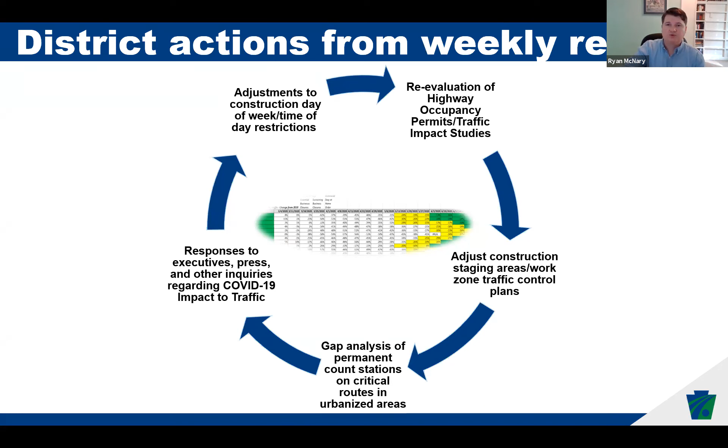So what we did with all this is we wanted to make a tool, going back to the TSMO performance program, where we could get out of the business of creating an Excel spreadsheet 2 times a week, but also empower our districts and our users to have the ability and some flexibility to look into the data on their own. Steve's going to be going over some specific examples of this, but I wanted to do the first introduction on what the tool can actually do.

One good thing about being virtual, I can pull this right up on my computer right now. So what you're looking at is the real data. Now this is in the dev environment, so we have it through October right now, but it gives you the filterability to look at specific districts, your type of roadway access, so limited or no access, county, road specific information. You have the ability to go day of week. You can do your peaks, for example.

I gotta make that smaller. 1 second. I'm just gonna do something real quick here. I'm gonna do passenger vehicle only. So you can see here that the lines in blue are your 2019 counts. The bars are your 2020 counts for passenger vehicles on your permanent count stations. So you can see when the impact occurred in real time, and then you can see where we are.

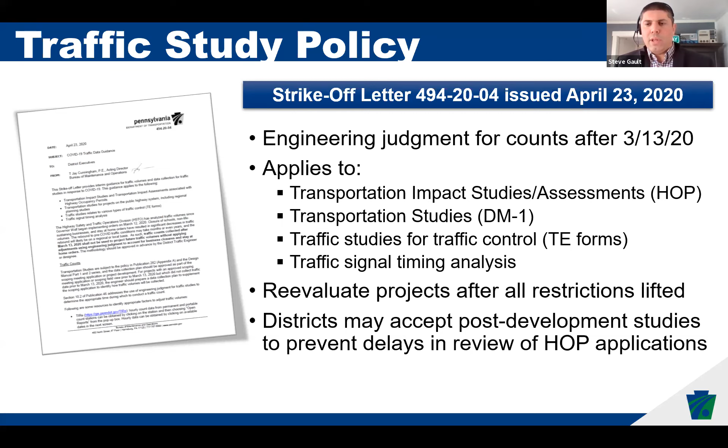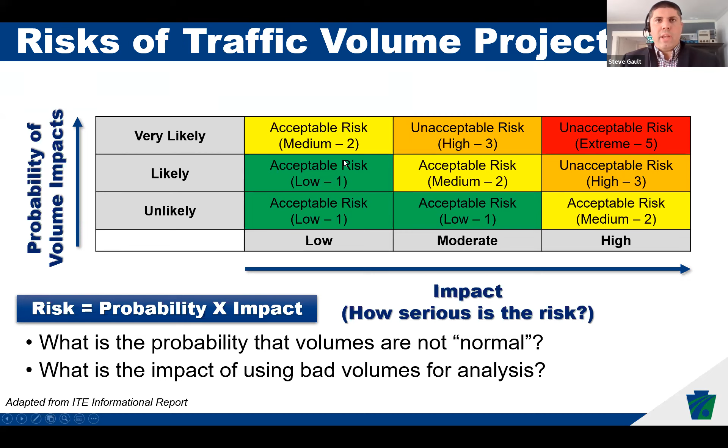And I think with that, Ryan, I'll turn back over to you to talk about the fuel tax. Appreciate it, Steve. So I said this kind of in the introduction. A request bounced around in the DOT a little bit to look into potentially projecting or coming up with a model based off of the information we have. So Doug kind of implored us to figure this out. You know, we brainstormed, and I believe, Doug, you gave us 24 hours to do this. So we came up with what you see in front of you.

Now we looked at our data sources and what we have. So we did partner with the Department of Revenue here. So we were able to get the gallons of gasoline and diesel that were sold. We know our tax rates for both. Second highest in the nation. I think we're all aware of that.

But then at that time, INRIX was also supplying a COVID percent VMT estimate, and I believe Streetlight was at the same time too. But what we've done since then is prepare a monthly report for projections based off of all the information we have, whether it's coming from the Department of Revenue or what we're seeing in our permanent count stations or what INRIX or Streetlight is reporting. And then we can project the upcoming month's revenue. Our outcome was we've been within 3% variance, plus or minus. So that's pretty good, we thought.

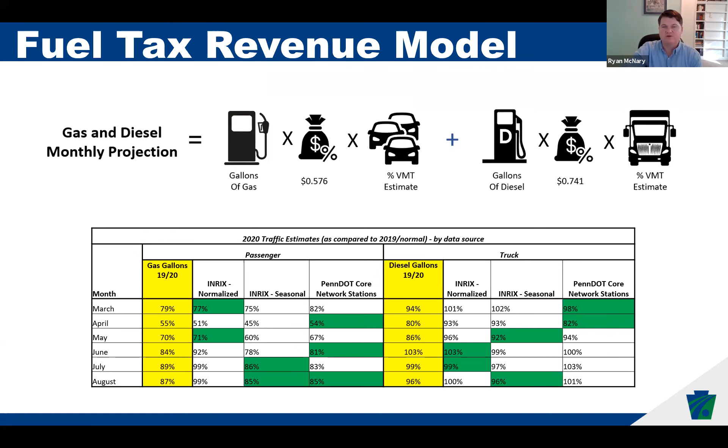But in the height of all this situation, I'll call it a situation, the COVID response, we saw those major drops, and it's a direct relationship to the revenue that you heard from the secretary on Wednesday. Kind of moving back to what Steve talked about is the new normal. What's driving this new normal? We don't really know. And honestly, it's because we don't have a great data set that tells us the who, wheres, whens, and whys. So we're investigating potential traffic data to improve that and answer those questions.

So this brought the origin and destination data concept back to the forefront again to understand who's moving now, where the commuter traffic is going. Put those hypotheticals to bed. It could potentially do that. In INRIX, for example, it's roughly around 3 million trips per day. Streetlight also offers this information. And primarily in Pennsylvania, a lot of our planning organization districts for major construction projects are already buying this to look at traffic impact studies. For example, if they're going to be taking a lane or multiple lanes on our interstates.

So we have an ongoing conversation right now with our program center. So it's a planning oriented office within PennDOT to maybe look into procuring a statewide license for this, but that's foresight. You heard the funding issues. We're probably not looking into new data soon, but if we can answer some questions here, it might be valuable. We have the number of existing DOT use cases elaborated on the bottom.

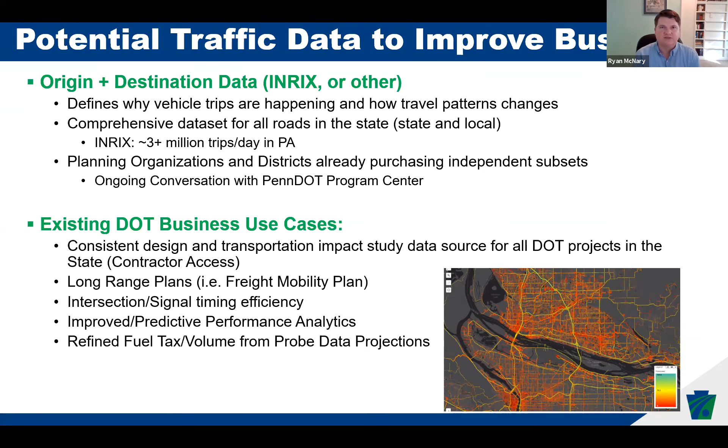So that's a lot of what we've done since March when it comes to volumes and working with our Bureau of Planning and Research and their permanent count stations. So I guess, Doug, we're probably taking questions at the end, but wanted to thank everybody for having us. We'll do them now. There's two questions that came in.

So was Planning and Research setting manual counts during the time frame? And if so, how is that information being used with the stuff in your program? Planning and Research setting manual counts during the time frame? Correct. We did not use the manual counts. We only used the permanent count stations. So the permanent count stations were out there. We didn't use any of the temporary counters for our analysis. I think that's what the question they're asking. I believe so. And you talked a little bit about it from the funding analysis about using the permanent count information.

One more question. For I-80, did truck traffic increase during COVID, resulting in the overall volumes being closer to normal? So I know from the info that you developed for the DTEs, we have roadway by roadway. Can you just offer any insight on what's going on on Interstate 80? So Steve, do you want to take that one?

Yeah, I don't have the numbers for I-80 specifically in front of me, but I know on the fuel tax slide that Ryan had up, as I saw that question come in, it looked like in June, July, and August, the fuel tax revenue was actually up about 1 to 3% statewide. So I think that's a sign that the truck volumes were up slightly. The passenger volumes were down in that 15% range statewide, and that's kind of where we've been relatively consistently for a while.

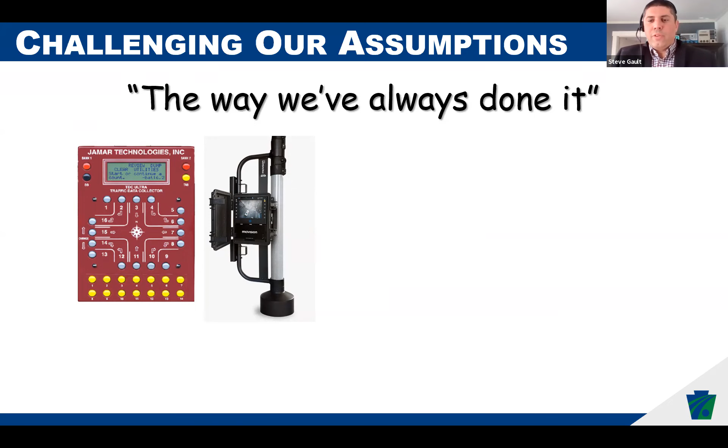Yep. Okay. So the traditional process for traffic signal timing started with turning movement counts, and then from there we go to modeling and optimization, typically using Synchro. And then at the end, we get a level of service. And we can think of that as our measure of effectiveness. And for traffic signals, the level of service is based on the control delay per vehicle.

And even though what constitutes the appropriate measures of effectiveness has already been evolving for the past several years, the COVID-19 pandemic provides new reasons to rethink our approach. So thankfully, we have the technology that can allow us to more effectively operate and time signals while keeping us all safe.

So I talked about that traditional traffic signal process, and its reliance on the manually collected turning movement count data. And the underlying assumption is the counts were done on a typical day. And that typical day is really the key thing. So historically, we assumed maybe a Tuesday, Wednesday, Thursday were typical days.

But imagine if a weather forecaster just picked a typical summer day and recorded the temperature because he thought it was somewhere between 4 and 6 p.m. Those are hours we use as traffic engineers, right? And said the temperature applied all day long and plan what to wear based on that forecast. So will you freeze in the winter? Well, of course, but why was this ever considered acceptable for traffic?

And if the traffic volumes were actually that predictable, then why are we spending millions of dollars trying to improve traffic signal operation and putting in technology and adaptive signals and all these things to account for variations? Well, that typical day assumption was pretty weak before, but the pandemic has dramatically changed traffic characteristics, and we haven't had anything close to a typical day since March.

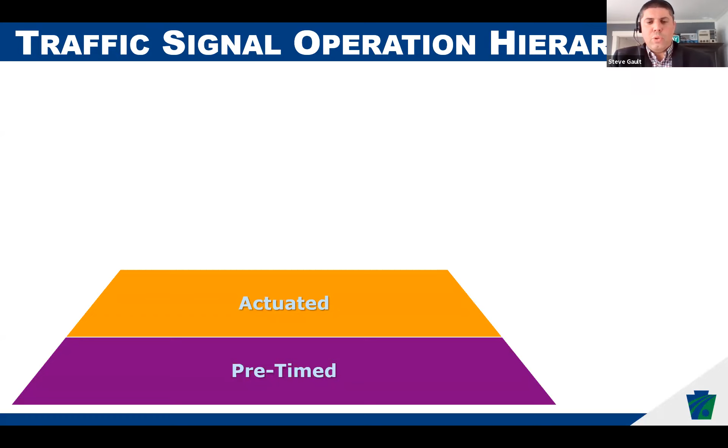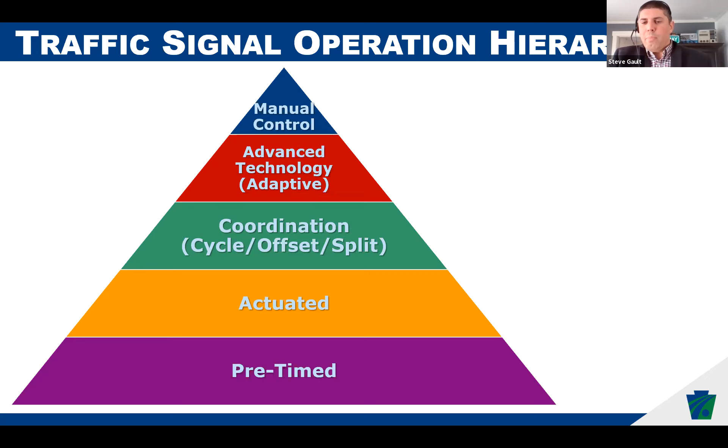And then we can start to link signals together with coordination and provide a cycle, offset and split to keep things synchronized and try to move traffic along a corridor. We can get more advanced technology such as adaptive signals and get more advanced in how we pick things. And then the one I put at the top, and this may sound a little strange, but I put manual control at the top because that's really the point where it could be something like an operator that's picking the timings for a specific event. So there's a lot of manual intervention, and it could even be using a pickle switch to manually advance the traffic signal phases based on live demand.

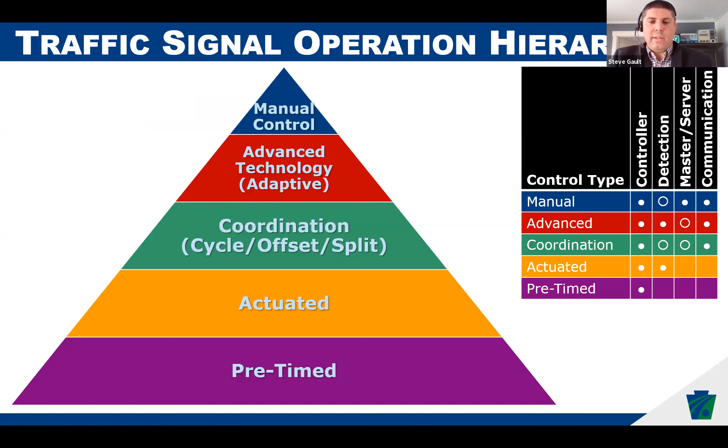So all of these require some combination of a controller, detection, either a master controller or server, and communication. And with all four of those components, they give us the most flexibility with what type of operation can be implemented at any given time. So when we want signals to work together and be synchronized, we typically call that coordination, and it involves the cycle, offset and split at each intersection. And there's different ways to pick what plan is going to operate at any given time. It's important to make sure that the clocks are synchronized for this to work.

The simplest method is a time of day schedule, which we have all over Pennsylvania, where the plan is predetermined based on the time of day and possibly the day of the week, or even the day of the month. The schedule can then reside in each controller, and it's being picked based on the schedule that's in the controller. It could come from a master controller, or it could come from a central server. Traffic responsive operation expands on this by selecting from predefined plans based on some sort of threshold of volume and occupancy from system detectors. And finally, a manual command is just saying, run this immediately, and this is the plan we want to implement now.

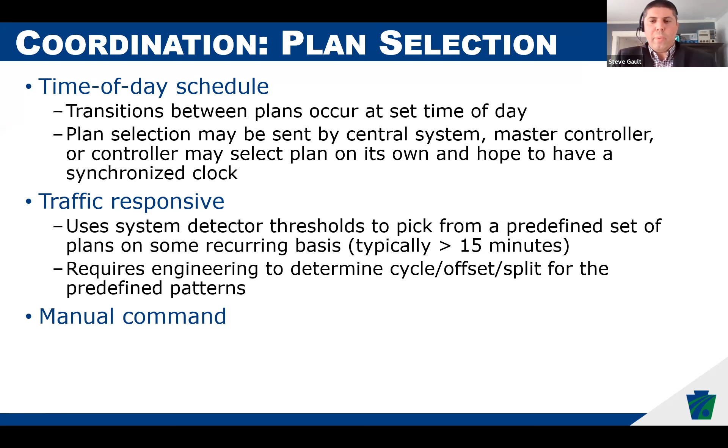So central systems allow an operator to remotely monitor and operate signals. And historically, PennDOT implemented a variety of central systems, with some examples shown here, based on municipal preferences and/or the low bid on a specific project.

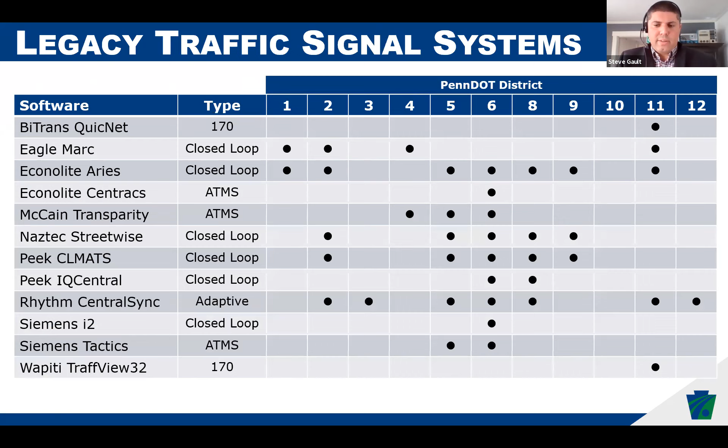So let's just take a scenario and think about it. So the interstate's closed. We need to detour traffic onto a signalized arterial. Maybe some cows got loose, which is a story I'll come back to. But then we have to think about, okay, what type of signal is it? Is it brand X, brand Y? And which computer is the one that runs that system?

And which seat do I need to sit in? And what are the steps that I have to do in that particular software to accomplish the same thing? And by the time we figure all that out, is the incident even still happening? Or did we take so long to actually even figure out what we need to do that it becomes irrelevant?

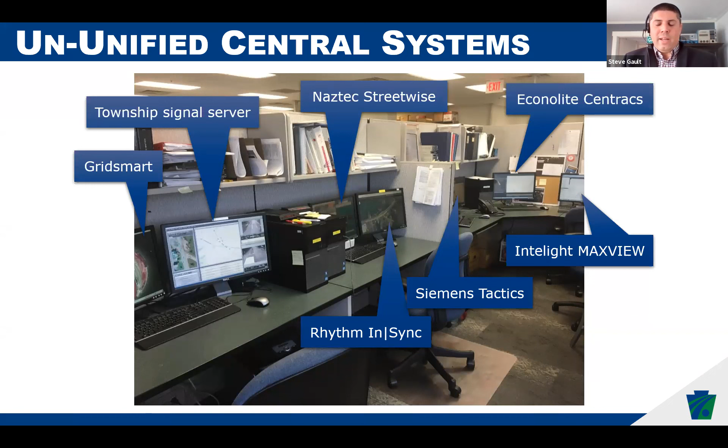So PennDOT's solution to this is a unified platform that can work with different brands of controllers, and what we call unified command and control. And there were a couple goals of why we did this, which should be fairly self-evident from what I was just explaining. But we wanted to provide neutrality in terms of the controller vendors. So we don't have to do proprietary bids. We don't get locked into any particular vendor for the hardware that's in the field.

And we can also make sure that municipalities that may have a certain preference are getting consistent equipment for their spare parts inventory. Obviously, the single platform is a key piece, and we want to be able to respond quickly to incidents, make sure that we can train people effectively and that they only need to learn one system,

and that will give us improved situational awareness. Even from a cost perspective, trying to maintain multiple different systems, each one has a support cost and contracts that we would need to be in with vendors to maintain the software and get patches and updates, and our IT staff needs to support all those. And finally, we want a platform that will allow us to measure performance, such as automated traffic signal performance measures.

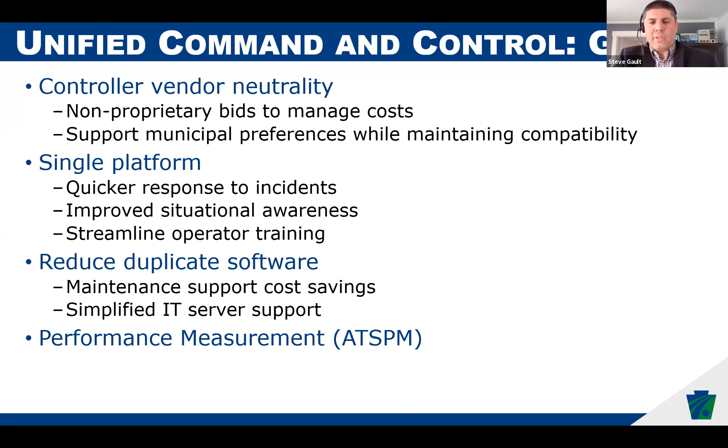So PennDOT procured the Intelight MAXVIEW system as our central system in 2018. And this is a web-based platform, which provides the benefit that we don't need to install any software on individual workstations for the operators to use it. At a basic level, it provides real-time monitoring and operation of signals that are connected to it. It provides a way to manage the controller timing databases. And it's also integrated with our OpenRoads ATMS software that's used in the regional traffic management centers for maintaining all of our other ITS devices.

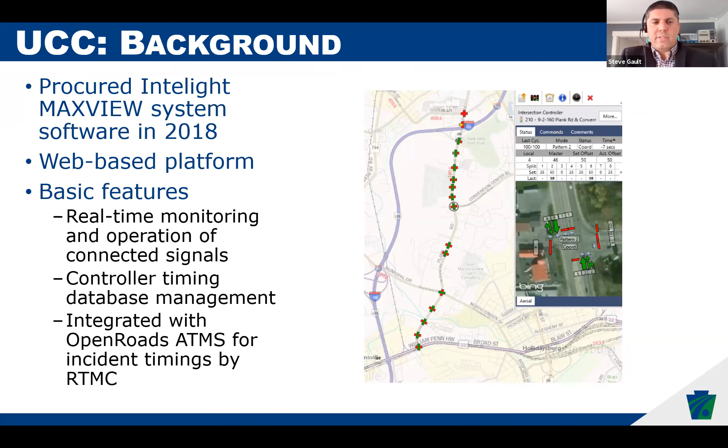On the communication side, we need an IP address for each controller. We need bandwidth to support once per second status polling. And when I say bandwidth to support that, we're not talking about a huge bandwidth. I think we figured out that each intersection is somewhere in the range of about 50 to 60 kilobytes per second, so not a huge amount. We need some way to get our IP field network between intersections, so we can have a backhaul that comes in and then have a field network that connects to that and bring it onto the PennDOT network.

So there's a couple different paths to get the controllers integrated. The first option is to use a controller that's already integrated into MAXVIEW. The second option would be that, if it's not already integrated, the controller vendor and Intelight work directly together. In that case, there's some cost potential depending on how that arrangement is worked out between Intelight and the vendor.

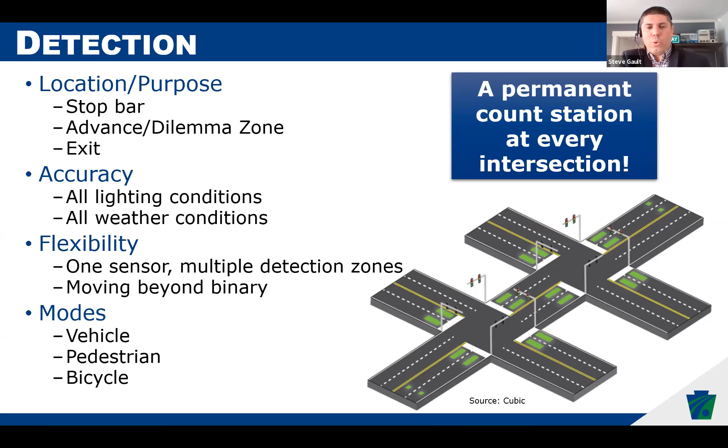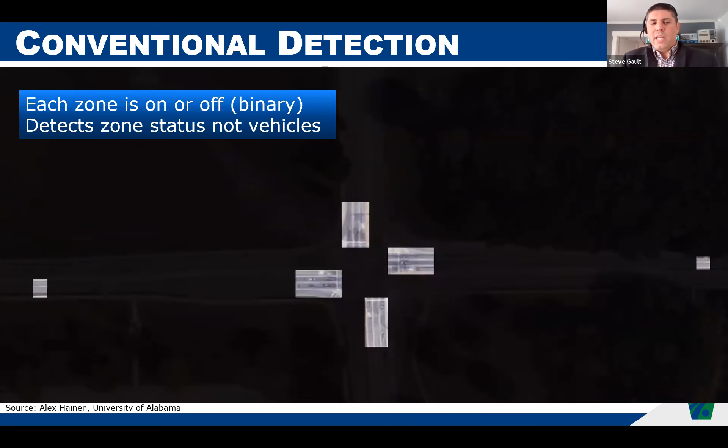So this is a snapshot of what detection often looks like now. So we have just an on or off. Is there somebody in these little boxes, and everything outside of those boxes is blind to us. But can we get to a point where we actually know information about individual vehicles? What lane are they in? How far are they from the stop bar? And how fast are they going? And there's detection that can do that now, and we're just not leveraging all those capabilities.

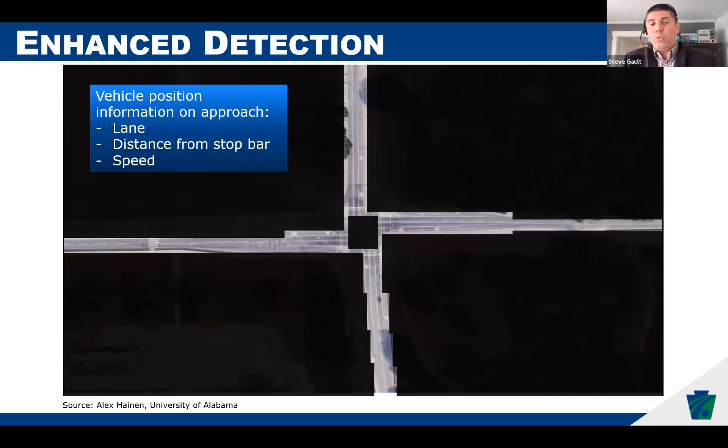So how does all this help? And how can this help us with the pandemic and even beyond? And I would say one of the first things to think about is, how can we start making decisions when we're installing signals, when we're upgrading signals? How do we install smarter signals? So the key pieces to that are a controller that can do the high resolution data collection. So that way we're leveraging that count station that we have at the intersection.

Having stop bar detection in each lane will give us information to help figure out phase utilization and see if the timing is effective. If we have advance or exit detection on the major approaches, that'll give us good volume data and help us figure out if vehicles are arriving on green and we're providing good progression. And finally, providing that central communications back to our MAXView system will allow us to use these features and do so much more, even if we're sitting stuck at home and can't actually go out and do things the way that we traditionally have. So what does that give us the ability to do?

24/7 volumes. So just thinking about, we talked about the 4 to 6 and the typical day. Well, if we have permanent count stations at the intersection, we can find out when there's seasonal variations. We can find out when there's variation, how much is the pandemic affecting traffic at this intersection? And how quickly can we then adapt to whatever the new normal is?

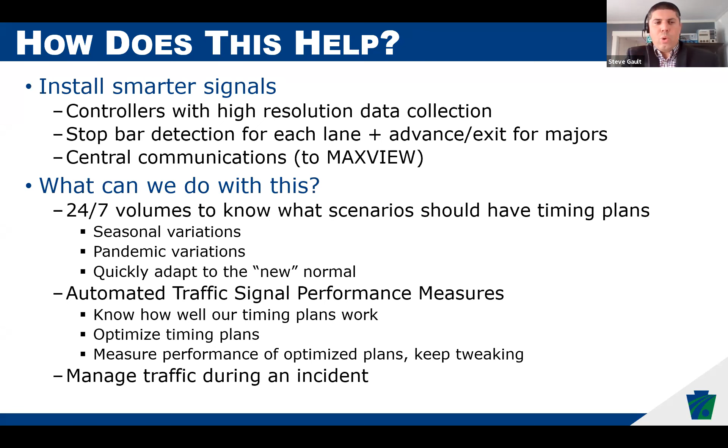We can do automated traffic signal performance measures. We can figure out how well do our signal plans work? Can we optimize the timing plans? And can we measure performance of the optimized plans or keep tweaking? And finally, can we manage traffic during an incident? So I'll just do a quick example here to wrap up. This was a case where we had an incident that occurred and closed a freeway, kind of similar to that example I gave before.

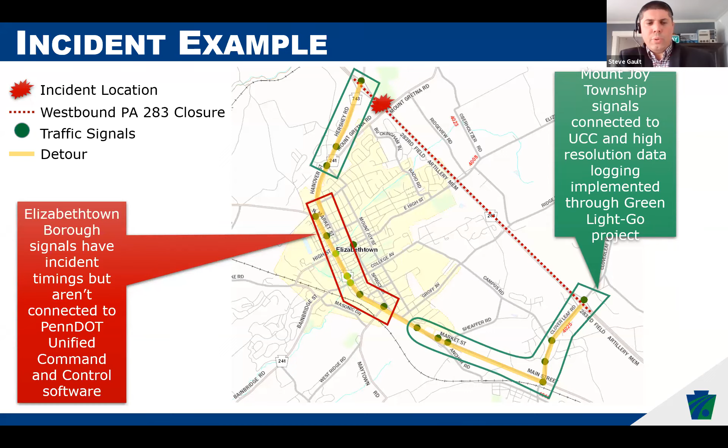And we were lucky that we had a lot of the signals connected to MAXView on the detour route, and we had plans that were in those controllers to do it. So we had an incident, and the timing of this actually worked out pretty well because it was after the PM peak, so the traffic volumes were a little bit lower and gave us an opportunity to test out how well this worked. But the incident happened around 7:30.

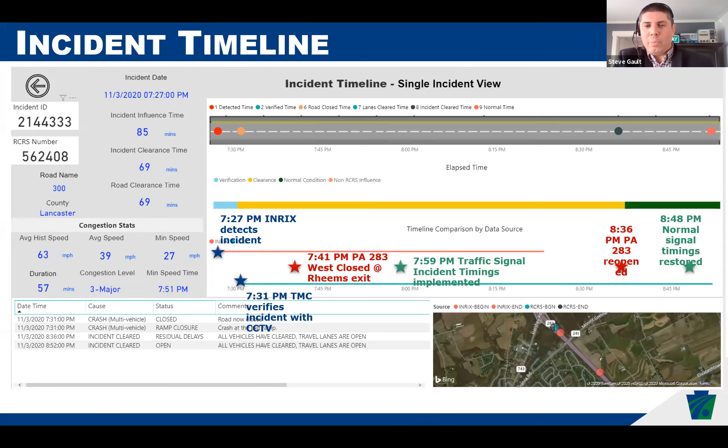10 minutes later, the highway was closed and everybody was detoured off of the ramp. And as we started looking at can we do the timing thing, this was not something that we really had all queued up. It was sort of a, hey, this is actually happening where we have the ability to do it, and let's do it. So in about 20 minutes, we got the timing plans implemented, and kind of what we saw from that.

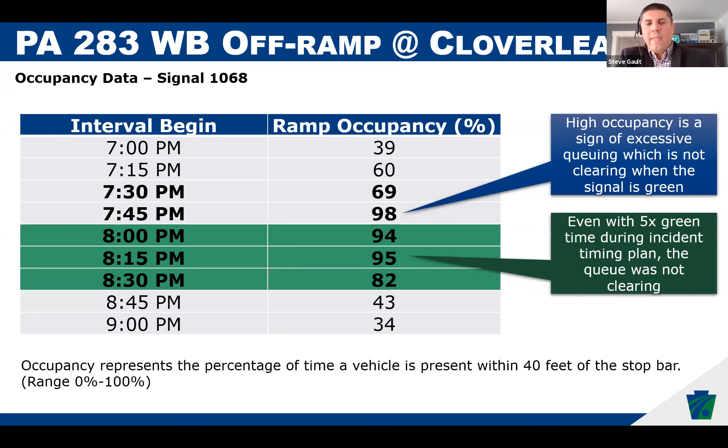So we had a little bit of time when the incident was diverting traffic and we were not doing anything with the signal timing. And we can see that on the off ramp where everybody was diverted, the occupancy, so what percentage of the time somebody is sitting at the stop bar, was almost 100% before we changed the timings. Even after we changed the timings, we weren't able to completely flush out everybody that was coming off the freeway, but we were providing over 5 times as much green time.

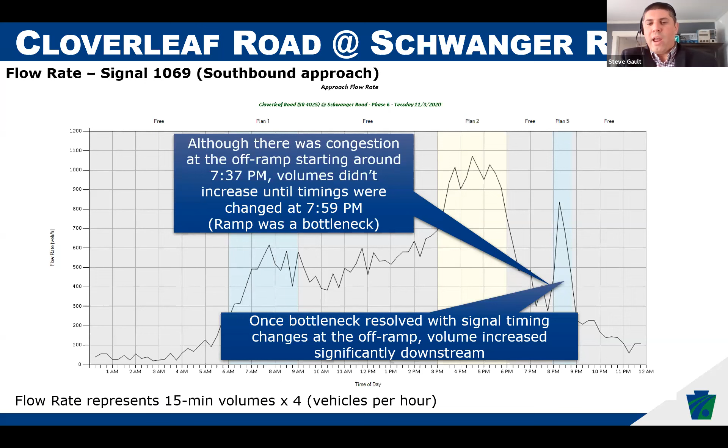And as we start to look into what did that do downstream, well, I mentioned the incident was diverting people before 7:45. So the volumes downstream on the detour route really weren't changing. So we had a little bit of an increase, but not much. Once we changed the timings and put in the flush plan to really start to move people along the detour, the volume spiked up. And that shows that we actually can move traffic more effectively through a detour with good signal timing.

It's also important to look at, is this going to impact people on the side street and cause more delay? And the good news is the side streets were still gapping out, even though they had less time dedicated to them.

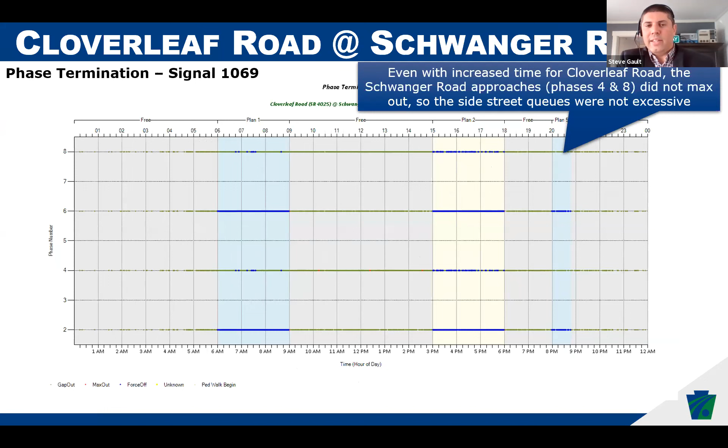And finally, the ultimate goal of this, and this is something that Ryan was really instrumental in helping to build with our ATMS software, is being able to activate these plans with one click. An operator in ATMS that doesn't know anything about signals, they just get a description that says, I have an incident, it's going to detour traffic on these roads, and click the checkbox, hit run, and the signals all retime themselves in the background through MAXView.

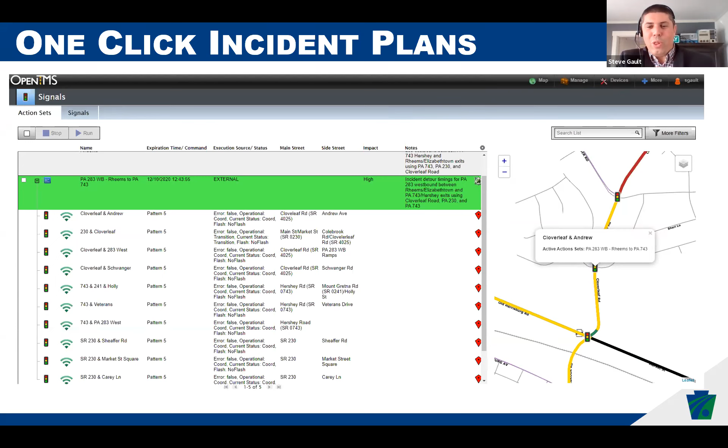So this is actually a shot from last night. I mentioned some loose cattle. Right as I was finishing up the last session last night, I heard there was an incident in the same location again. So we got to do another example. Unfortunately, I didn't have time to compile all the data and see how well it worked, but it was actually during the PM peak, so it's probably going to look a little bit different.